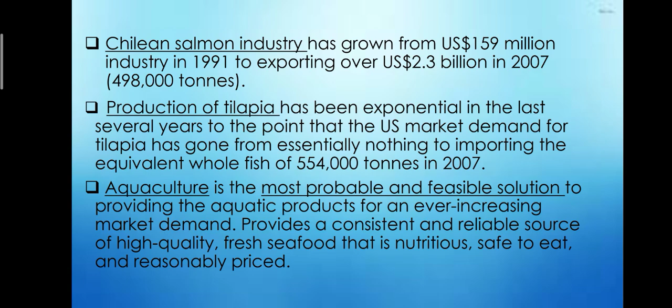It provides a consistent and reliable source of high quality, fresh seafood that is nutritious, safe to eat, and reasonably priced. So here are the positive attributes.

As a comparison, conventional aquaculture methods such as outdoor pond systems and net pen systems are not likely to be sustainable in the long term due to significant environmental issues and their inability to guarantee the safety of their products to consumers.

Indoor fish production employing recirculating aquaculture systems is sustainable, infinitely expandable, environmentally compatible, and has the ability to guarantee both the safety and quality of the fish produced throughout the year.

The indoor recirculating aquaculture system offers the advantage of raising fish in a controlled environment, permitting controlled product growth rates and a predictable harvesting schedule.

Recirculating aquaculture systems conserve heat and water through water reuse after reconditioning by biological filtration using biofilters. These systems allow effective economies of scale, which results in the highest production per unit area and per unit worker of any aquaculture system.

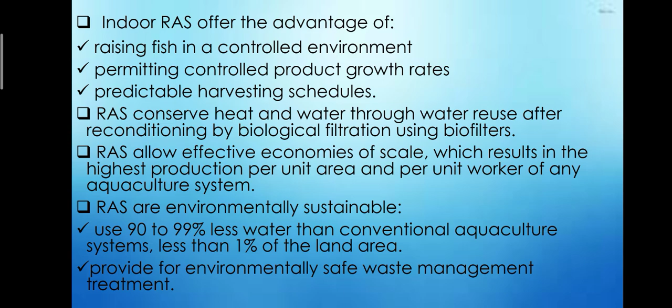Recirculating aquaculture systems are environmentally sustainable. They use 90 to 99% less water than conventional aquaculture systems, and less than 1% of the land area. They also provide for environmentally safe waste management treatment.

Recirculating aquaculture systems allow year-round production of consistent volumes of product and complete climate control of the rearing environment. It is almost universally employed to produce salmon smolts, and designs continue to improve, becoming more cost competitive with conventional aquaculture systems. These designed aquaculture systems are also infinitely scalable.

Indoor aquaculture is probably the only potential method that could be used to ensure a 100% safe source of seafood, free from all chemicals and heavy metals.

With increasing consumer concerns about food safety, aquaculture producers using recirculating aquaculture systems have an unprecedented opportunity to meet the demands for safe seafoods. Attributes of fresher, safer, and locally raised products are clear advantages for recirculating aquaculture system produced seafood.

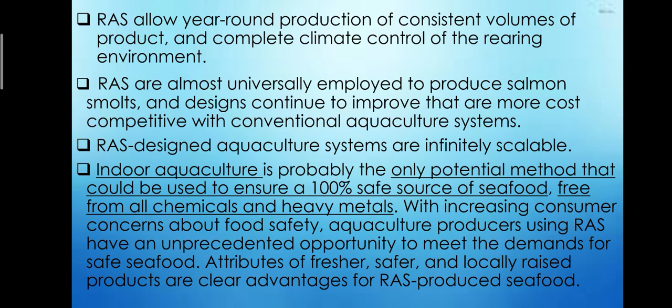There are also numerous commercial systems that have opened with fanfare and have quietly gone out of business. Many of these early systems were designed using traditional wastewater treatment concepts and engineering, with a simple trial and error approach.

So aquaculture engineering has come of age, and systems have been engineered specifically for aquaculture and the unique needs of an aquatic biological system, according to Timmons and Ebeling, 2010.

The species successfully being cultivated in intensive recirculating systems include tilapia, striped bass, cobia, pompano, barramundi, and marine shrimps.

Section 11.2, Overview of System Engineering. This is Figure 11.1, unit processes used in a recirculating system. This figure shows how a recirculation system can be divided into several individual unit processes that may correspond to separate systems or be linked together in a process stream.

The water moves from the central fish culture tank and flows through systems that remove the settleable and suspended waste solids, remove the fine and dissolved solids, convert the ammonia to nitrate, remove carbon dioxide and add oxygen, and finally, when required, disinfect the water before returning it to the culture tank.

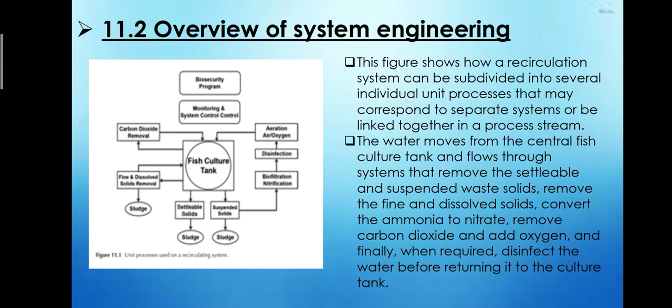The monitoring and control system oversees all of these processes and controls the set points for water quality, sounding an alarm if they move outside of acceptable ranges.

A biosecurity program and process must be absolutely superimposed on the whole process and farm to prevent losses due to disease introduction from the outside.

10 to 20% of the discharge flow from the culture tank is removed from the center drain to take advantage of the teacup effect, which concentrates the solids in the central drain flow.

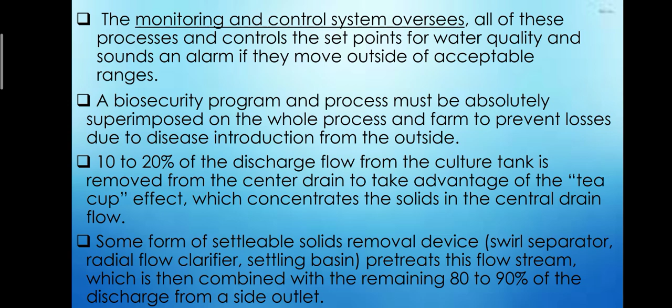Some form of settleable solids removal device, like a swirl separator, radial flow clarifier, or settling basin, pretreats this flow stream, which is then combined with the remaining 80 to 90% of the discharge from a side outlet. This combination of central drain and sidewall drain is usually referred to as a Cornell dual drain system.

Remaining suspended solids are then removed, usually by either a rotating microscreen filter or floating bead filter. Water then flows to some form of biofiltration, such as a trickling tower, bead filter, fluidized sand filter, or moving bed bioreactor, where ammonia is converted to nitrate by autotrophic bacteria.

At high loading densities, a carbon dioxide stripping column is required to remove excess carbon dioxide and aerate the water to saturation. Finally, where high stocking densities are used in commercial systems, an oxygenation device is employed to supersaturate the flow to provide sufficient oxygen.

11.3 Culture tanks. Over the years, people have used a wide variety of materials to construct tanks, including just about anything that holds water. Simple molded polyethylene tanks are often used due to their low cost, smooth surface that makes for easy cleaning, and their low weight, which allows for quick setup and relocation. They work well for the most part, but because they are very soft and malleable, they need to be well supported on the bottom.

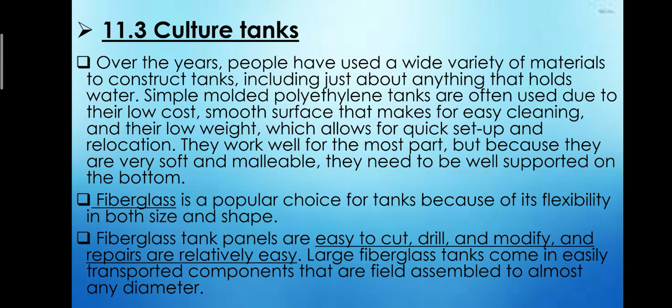Fiberglass is a popular choice for tanks because of its flexibility in both size and shape. Fiberglass tank panels are easy to cut, drill, and modify, and repairs are relatively easy. Large fiberglass tanks come in easily transported components that are field assembled to almost any diameter.

For maximum strength and resistance to abuse, galvanized or epoxy-coated steel modules can be bolted together to form tanks that are extremely large and deep. The bottoms are usually poured concrete where drains and heating coils are embedded, along with the tank sidewalls. Tanks can be partially buried to conserve heat and make fish observations easier.

Concrete must always be an option in making tanks, extremely strong but very permanent.

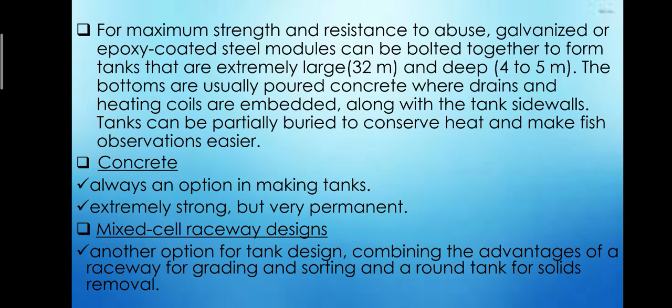Next is mixed cell raceway designs, another option for tank design, combining the advantages of a raceway for grading and sorting and a round tank for solids removal. To promote mixing and solids removal, it is important that the tank has good hydraulic characteristics.

One of the most important rules for a recirculating aquaculture system is that solids need to be removed from the tank as quickly and efficiently as possible to reduce the solids' impact on water quality.

Tanks can be characterized by diameter to depth ratio. This ratio should be maintained at greater than 3, less than 10, and preferably less than 5, as in a deeper tank given the same diameter. Using this range will minimize the problems of solids settling before reaching a center drain, or not settling fast enough to reach the drain by being continually resuspended.

11.4 Waste solids removal. Waste solids are produced in an aquaculture system as uneaten feed, feed fines, fish fecal matter, algae, sloughed biofilm cell mass from biological filters.

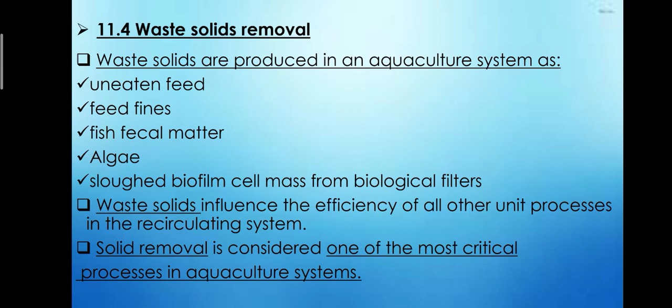Waste solids influence the efficiency of all other unit processes in the recirculating system, so solids removal is considered one of the most critical processes in aquaculture systems.

Solids are generally classified into three categories: settleable, suspended, and fine or dissolved solids. In recirculating systems, the first two are the primary concern, while dissolved organic solids can become a problem in systems with very little water exchange.

Waste solids can be removed either by settling within the culture unit or through the use of a solids removal unit following the rearing tank. Several unit process options are currently being used in aquaculture: settling basins, granular media filters, radial flow clarifiers, mechanical filters, and flotation or foam fractionation.

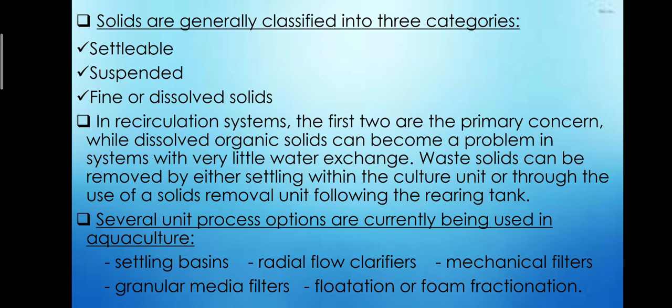11.5, the Cornell dual drain system uses the culture tank itself as a swirl separator, or the teacup effect, and removes most of the settleable solids from a small percentage of discharge from the center drain.

This design is applicable to round tanks and is very effective in removing the majority of large, quickly settleable solids, such as uneaten feed and fecal matter, using only a small portion of the total water flow, 10 to 25%. This waste stream can then be further concentrated using either settling basins or additional swirl separators.

Remember, the objective is to create a small, concentrated flow that is easily treated, rather than a large, diluted flow of waste.

Solids that concentrate at the bottom center can be removed in a small flow stream using a bottom center drain, while the majority of flow is withdrawn at an elevated drain. This dual drain system uses a center drain that removes 10 to 25% of the flow and a higher sidewall drain for the majority of the flow.

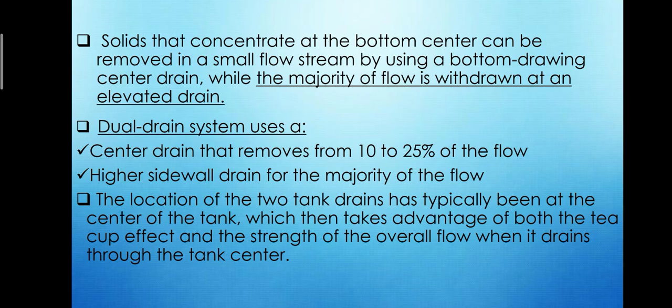The location of the two tank drains has typically been at the center of the tank, which takes advantage of both the teacup effect and the strength of the overall flow as it drains through the tank center.

As we can see in this picture, figure 11.2, this is a sidewall discharge box with a standpipe for water level control, handling 75 to 90% of total discharge flow from the rearing tank.

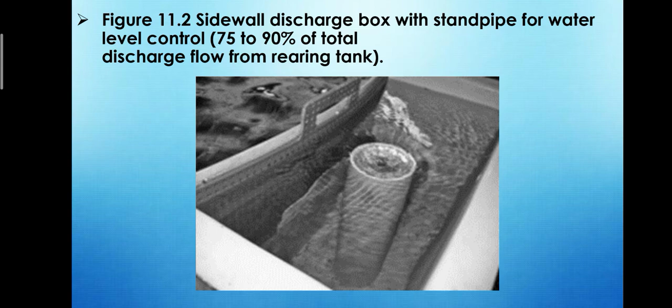Next we have hydraulic retention time: the center drain retention time is 200 minutes, and next is 15 to 25% of total tank flow rate. After calculating these three values, the largest of the three should be used.

The final criterion that should be applied to the drain design outlet is that the tank outlet should be approximately 10% of the tank diameter. This is because if this ratio recommendation is followed, solids should settle on the floor within about 5% of the tank diameter from the center drain and be removed.

The alternative Cornell dual drain approach has significant economic implications. When using this approach, solids removal costs are controlled more by the volume of flow treated rather than the solids concentration of the effluent treated. By concentrating the majority of the solid waste into only 10 to 25% of the flow leaving the tank via the center low flow drain, treatment costs are proportionately reduced as well.

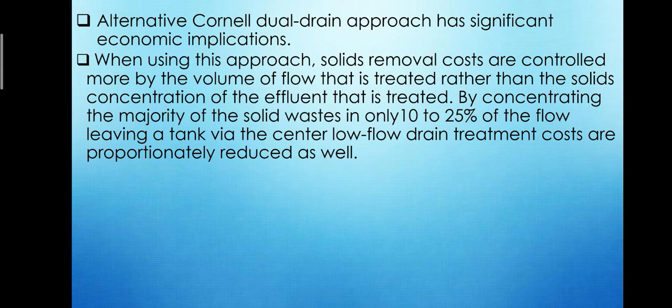Next we have 11.6, settling basins and tanks. A tank that provides a quiet, non-turbulent area where the flow rate is slowed and the solids are allowed to settle out of suspension by gravity.

In an attempt to increase sedimentation, tube or plate settlers, consisting of a sequence of inclined tubes or plates stacked several centimeters apart, are often used. This increases the effective settling area per unit volume and reduces the depth to which a particle must settle to contact the surface.

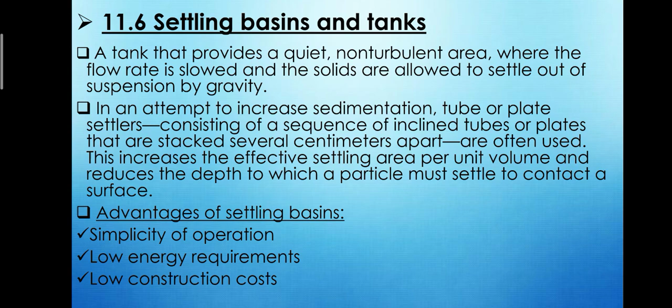The advantages of settling basins are simplicity of operation, low energy requirements, and low construction costs. The disadvantages include the relatively large size of settling basins, low removal efficiencies of small or low density particles, and leaching of nutrients from the settled solids back into the system while the solids are stored in the settling basins.

Another method to increase sedimentation rate is through the use of swirl separators or hydrocyclones. The effluent water from the culture tank is injected at the outer edges of a conical tank so that the water spins around the tank's center axis.

The spinning creates a centrifugal force that moves the particulates toward the wall, where they settle and can be removed continuously. These have most often been used in aquaculture recirculating systems to concentrate the solids from the dual drain culture tank system. Next we have 11.7, mechanical filters.

The two types of mechanical filters commonly used in aquaculture to remove suspended solids are screen filters and expandable granular media filters. Suspended solids, from an aquaculture viewpoint, are the fraction of total solids that will not settle out of the water column in a reasonable amount of time, 30 to 60 minutes.

This fraction of the solid waste needs to be removed from the culture tank water because of its potentially high oxygen demand and mineralization, due to the increased rate of ammonia nitrogen being added to the water column as the protein and urea in the feces is broken down by bacteria into ammonia.

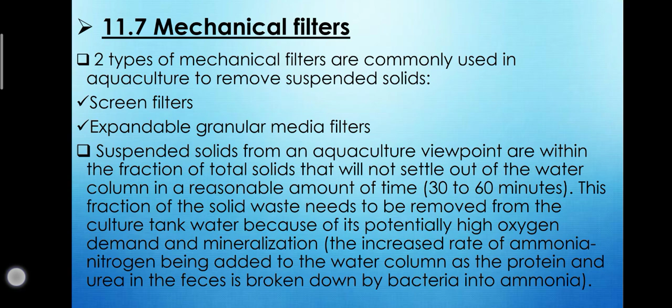Microscreens are used to remove suspended solids in both research and commercial recirculating systems. They act as a form of sieve that retains suspended particles larger than the fine mesh filter screen openings.

The screens are interchangeable, and mesh size is usually selected based on characteristics of the water to be treated, required discharge water quality, and trade-offs of size, cost, and waste discharge volumes. Microscreens are especially attractive when used to remove solids from large flow streams. Additionally, they are compact in size and cause minimal head loss.

So the disadvantages of these systems are high maintenance requirements and the relatively high capital and operating costs.

The performance of the microscreen filter is largely dependent on the size of the filter screen openings, the fraction of particles removed, the filter's hydraulic capacity, sludge water production rate and concentration, and filter backwash frequency.

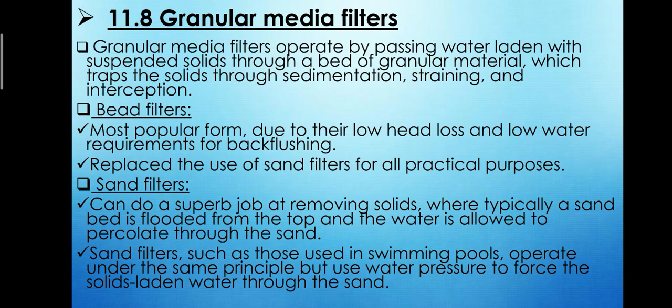When the pressure requirements to push the water through the sand become excessive, the sand filter goes into a backwash mode and discharges large quantities of water. With either sand filter approach, excessive water loss occurs, and management of either design has always been a challenge.

Bead filters employ small 3 to 5 millimeter low density polyethylene beads as the filtering media in pressurized upflow filters. This type of plastic media is commonly used as feedstock for the plastic injection molding process.

Filtration is accomplished by trapping suspended solids particles within the bead matrix and periodically agitating the beads to settle out the trapped solids and biofloc. These filters have been successfully used for both solids capture and biofiltration.

Traditionally, the chief disadvantage of this type of filter has been the large volume of water required for backflushing, although much less is required than in a sand filter design. The PolyGeyser class of bead filters has successfully addressed this problem.

Many of the fine suspended solids and dissolved organic compounds that build up over time in intensive recirculating systems are not removed by mechanical filtration or granular media filters. These solids can be removed by a process usually referred to as foam fractionation, air stripping, or protein skimming.

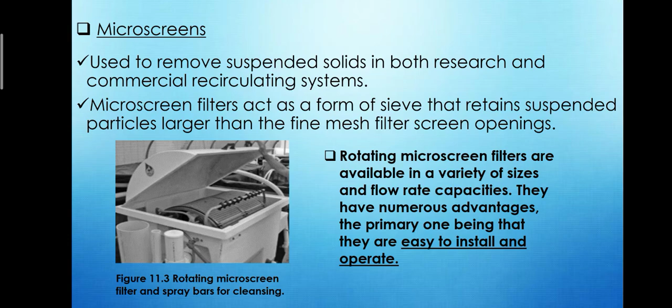In this process, air bubbles rising, air bubbles. Sorry for that.

In this process, air bubbles rising through a closed contact column physically adsorb the fine suspended solids and dissolved organic compounds onto the surfaces of the air bubbles. The bubbles create foam at the top of the liquid column, and the organic waste can then be disposed of along with the foam produced.

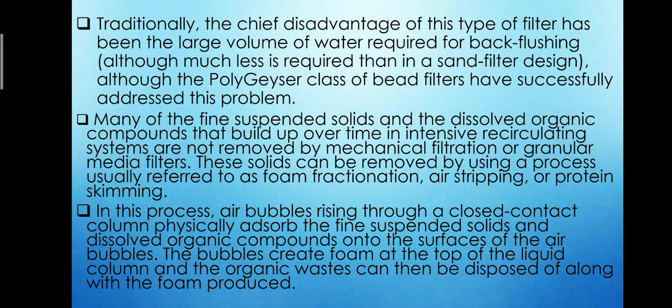Next, we have 11.9, the disposal of the solids. Solids generated by these removal methods can have significant impact on the environment if not disposed of appropriately. In general, aquaculture solid waste is treated as an agricultural waste and considered a non-toxic nutrient source.

Several options are utilized for disposal, including agricultural application on land and composting. Land application of waste solids to an on-site agricultural field is usually the cheapest method of solids disposal.

Land application is governed by regulations that limit the amount of pathogens, heavy metals, and other contaminants, as well as nutrient content, soil type, and plant nutrient uptake characteristics, to prevent runoff or groundwater contamination.

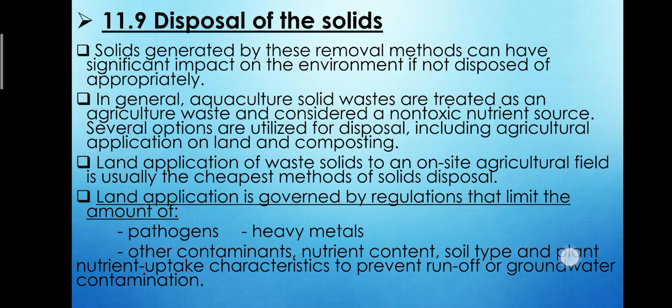One of the newest techniques for containing sludge is to use geotextile bags. These are porous textile bags that receive the waste stream and capture solids while allowing the water to drain off for recapture.

Polymer or flocculation agent is added to the influent to improve solids and liquid separation.

Next, we have alum or ferric chloride, which can also be added as a coagulation aid, which also helps to sequester dissolved phosphorus.

Composting of waste solids using thermophilic bacteria creates a valuable soil amendment and can also be used to dispose of fish mortalities in a safe manner. Anaerobic and aerobic waste lagoons can be used, but will require careful engineering design to be properly sized and managed.

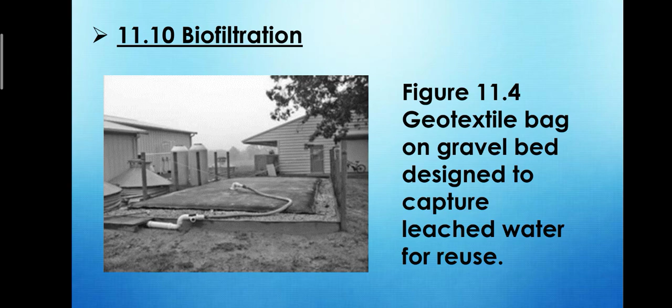Next, we have 11.10, biofiltration. This figure, 11.4, shows the geotextile bag on a gravel bed designed to capture leached water for reuse.

Nitrogen is an essential nutrient for all living organisms and is found in proteins, nucleic acids, adenosine phosphates, pyridine nucleotides, and pigments. In the aquaculture environment, there are four primary sources of nitrogenous waste.

These are urea, uric acid, and amino acids excreted by the fish, organic debris from dead and dying organisms, uneaten feed and feces, and lastly, nitrogen gas from the atmosphere.

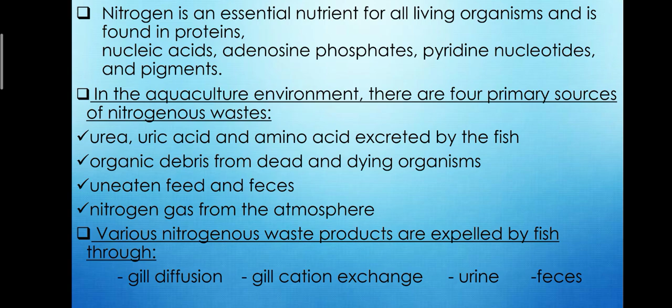Various nitrogenous waste products are expelled by fish through gill diffusion, gill cation exchange, urine, and feces. The decomposition of these nitrogenous compounds is particularly important in intensive recirculating aquaculture systems because of the toxicity of ammonia, nitrite, and to some limited extent, nitrate.

Nitrification is the process of bacterial-driven ammonia removal in a biological filter, consisting of the successive oxidation of ammonia to nitrite and finally to nitrate. Denitrification is the reverse process, an anaerobic process where nitrate is converted to nitrogen gas.

Especially in marine systems, as stocking densities increase and water exchange rates are reduced, resulting in excessive levels of ammonia in the culture system. Nitrification is a two-step process, where ammonia is first oxidized to nitrite and then nitrite is oxidized to nitrate. The two steps in the reactions are normally carried out sequentially. Since the first step has a higher kinetic reaction rate than the second step, the overall kinetics are usually controlled by ammonia oxidation, and as a result, there is usually no appreciable amount of nitrite accumulation.

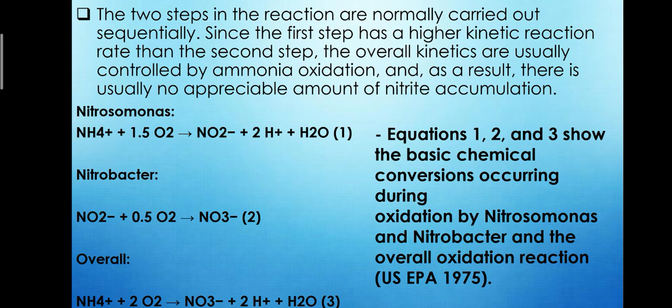So these are the equations 1, 2, and 3. This shows the basic chemical conversions occurring during oxidation by Nitrosomonas and Nitrobacter, and the overall oxidation reaction according to US EPA 1975. Based on these relationships, 4.57 grams of oxygen and approximately 7.14 grams of alkalinity are needed for the complete oxidation of 1 gram of ammonia nitrogen.

Alkalinity, measured or defined in terms of calcium carbonate, is generally added using sodium bicarbonate or baking soda, or calcium carbonate, slaked lime, or hydrated lime. Sodium bicarbonate has the advantage of being rapidly dissolved and very safe to handle. Conversely, the various lime compounds are not easy to dissolve and are dangerous to handle. The lime products, though, are often much less expensive per unit of alkalinity than baking soda.

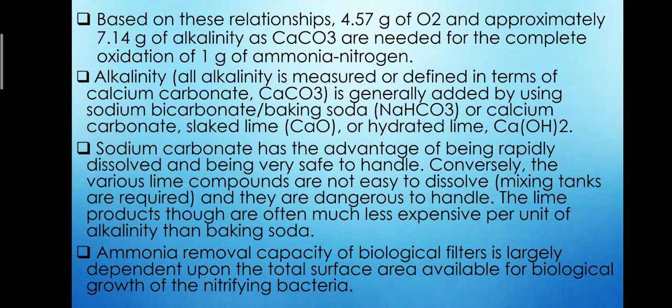Ammonia removal capacity of biological filters is largely dependent upon the total surface area available for biological growth of the nitrifying bacteria. For maximum efficiency, the media used balance a high specific surface area with an appreciable voids ratio for adequate hydraulic performance of the systems.

Media used in biofilters must be first inert, second non-compressible, and non-biologically degradable. Typical media used in aquaculture biofilters are sand or some form of plastic or ceramic material shaped as small beads or large spheres, or rings or saddles.

Biofilters must be carefully designed to avoid oxygen limitation or excessive loading of solids and biochemical oxygen demand, or ammonia. Here are the several types of biofilters commonly used in commercial intensive recirculating aquaculture systems: trickling biofilters, floating bead filters, fluidized bed biofilters, downflow microbead filters, and moving bed bioreactors.

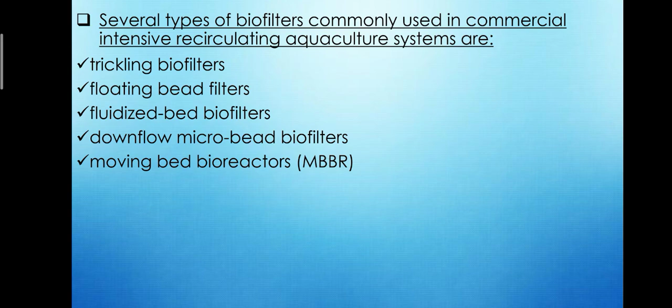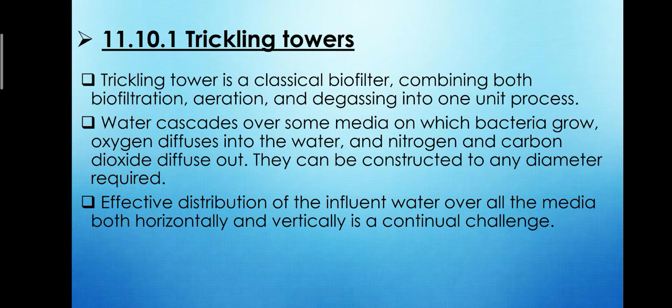Next, 11.10.1, the trickling towers. A trickling tower is a classical biofilter combining biofiltration, aeration, and degassing into one unit process. Water cascades over media on which bacteria grow, oxygen diffuses into the water, and nitrogen and carbon dioxide diffuse out. They can be constructed to any diameter required. Effective distribution of the influent water over all the media, both horizontally and vertically, is a continual challenge.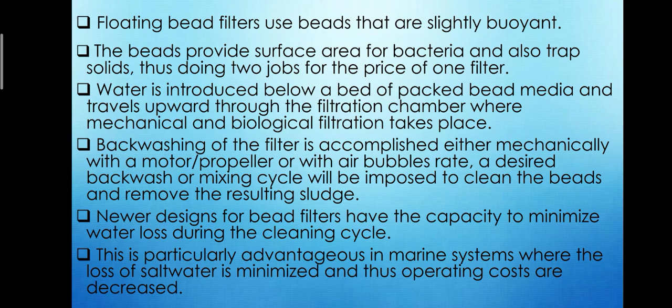Backwashing of the filter is accomplished either mechanically with a motor propeller or with air bubbles. A desired backwash or mixing cycle will be imposed to clean the beads and remove the resulting sludge. Newer designs for bead filters have the capacity to minimize water loss during the cleaning cycle. This is particularly advantageous in marine systems where the loss of salt water is minimized, thus decreasing operating costs.

Next, 11.10.3, fluidized sand beds. These are usually used in large-scale cool or cold water applications and provide large surface area for bacteria in a small footprint. These filters get their name because as water flows up through the sand bed, the sand becomes suspended in the flow, or fluidized. Numerous designs have been investigated and found to perform effectively, particularly for cool water applications that use fine sands. Fluidized sand beds can be relatively more expensive to operate than other filters due to the high pump rates and pressures required to fluidize the sand bed.

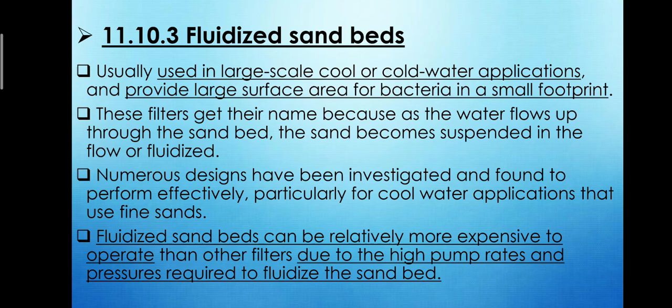Next, 11.10.4, the downflow microbead biofilter.

This has been used for several years due to their simplicity and low cost of media. The filters use small plastic beads, 1 to 3 millimeters, that float in the biofilter as the water flows down through them. The high specific surface area, low head loss, and small footprint make them a strong competitor to other biofilter designs. The styrofoam microbeads are also a fraction of the cost of other media.

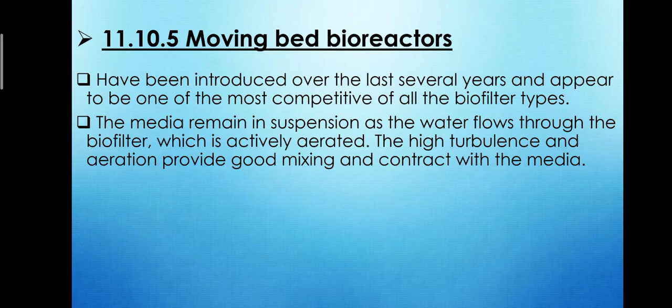Next, we have 11.10.5, the moving bed bioreactors. These have been introduced over the last several years and appear to be one of the most competitive of all the biofilter types. The media remain in suspension as the water flows through the biofilter, which is actively aerated. The high turbulence and aeration provide good mixing and contact with the media.

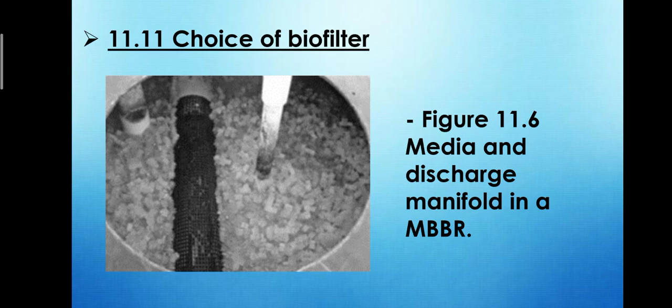Next, we have 11.11, choice of biofilter. In this figure 11.6, this is the media and discharge manifold in an MBBR.

One of the chief advantages of both the trickling biofilter and the MBBR is that they both add oxygen to the water flow during normal operation. They can provide some carbon dioxide stripping. In contrast, the submerged biofilters, floating bead filters, microbead filters, and fluidized bed biofilters are all net oxygen consumers and must rely solely on the oxygen in the influent flow to maintain aerobic conditions for the biofilm. If, for whatever reason, the influent flow is low in dissolved oxygen, or the incoming flow to the biofilter is too low, anaerobic conditions will be generated within the biofilter.

The application of low specific surface area media is a distinct disadvantage for both the trickling biofilters and the MBBR. Since the capital cost is proportional to the total surface area of the filters, the result is physically large and requires more costly filters. In contrast, floating bead filters, and especially fluidized bed filters and downflow microbead filters, use media with high specific surface area, resulting in reduced cost and space requirements for the equivalent surface area.

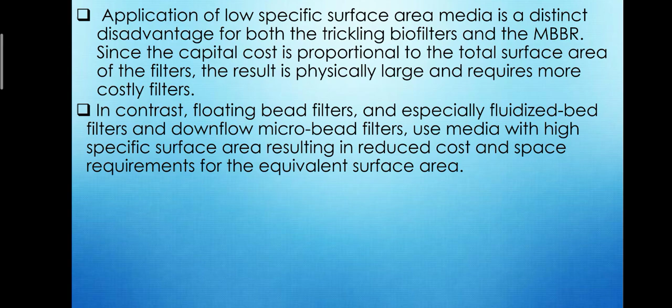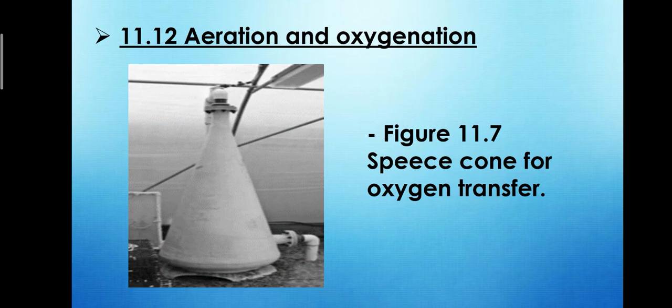Next, we have 11.12, aeration and oxygenation. This figure is the Speece cone for oxygen transfer. Dissolved oxygen is the first limiting factor in intensive aquaculture systems. Minimum dissolved oxygen concentrations of 4 to 6 milligrams per liter are required for optimal growth and survival of most aquaculture species. At densities up to 45 kilograms per meter cubed, aeration with atmospheric oxygen is adequate to maintain this level and is commonly referred to as aeration.

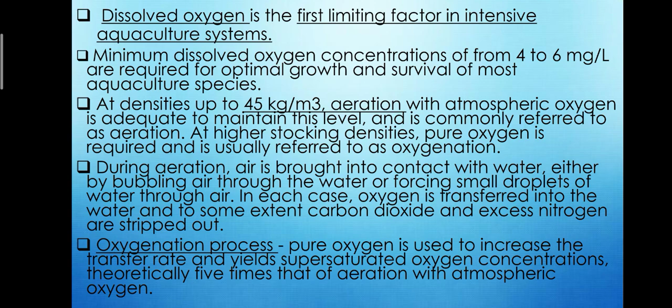At higher stocking densities, pure oxygen is required and is usually referred to as oxygenation. During aeration, air is brought into contact with water, either by bubbling air through the water or forcing small droplets of water through air. In each case, oxygen is transferred into the water and, to some extent, carbon dioxide and nitrogen are stripped out. Oxygenation process: pure oxygen is used to increase the transfer rate and yield supersaturated oxygen concentrations, theoretically five times that of aeration with atmospheric oxygen.

Oxygen can be produced on site using pressure swing adsorption equipment, or purchased in bulk liquid or gas form from commercial sources. There are numerous types of oxygen transfer equipment now available from commercial sources. This includes U-tubes, packed columns, multi-stage low-head oxygenation units, pressurized columns, oxygenation cones, oxygen aspirators, bubble diffusers, and enclosed mechanical surface mixers. The two most often used in large-scale commercial systems are the downflow bubble contactor and the multi-stage low-head oxygenation unit.

The downflow bubble contactor consists of a cone-shaped column with water and oxygen injected at the top and removed at the bottom. As the water and oxygen bubbles move down the cone, the downward velocity of the water decreases due to the increasing cross-sectional area until it equals the upward velocity of the oxygen bubbles. This yields a long contact time between the oxygen bubbles and the water, resulting in oxygen diffusion efficiencies at or above 90%.

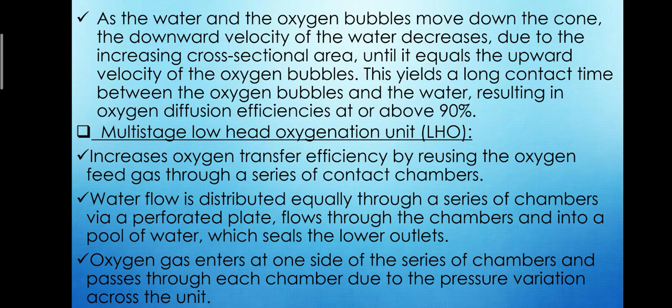Next, the multi-stage low-head oxygenation unit. It increases oxygen transfer efficiency by reusing the oxygen feed gas through a series of contact chambers. Water flow is distributed equally through a series of chambers via a perforated plate, flows through the chambers and into a pool of water, which seals the lower outlets. Oxygen gas enters at one side of the series of chambers and passes through each chamber due to the pressure variation across the unit. The repeated contact of oxygen and water in each chamber provides a high rate of gas transfer, both oxygen into the water and excess nitrogen out.

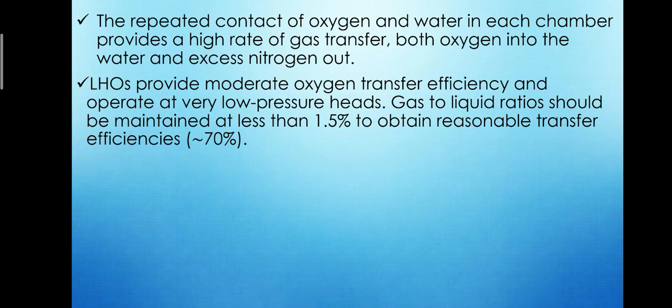LHOs provide moderate oxygen transfer efficiency and operate at very low pressure heads. Gas to liquid ratios should be maintained at less than 1.5% to obtain reasonable transfer efficiencies.

Next, we have 11.13 Carbon Dioxide Removal. Carbon dioxide is a product of respiration of fish and other organisms in the production system, such as the bacteria and the biofilm. At low stocking densities, carbon dioxide is removed by physical agitation and exposure of the water to air. But advances in recirculation system design and management have resulted in a steadily increasing stocking density of fish and a reduction in water exchange rates.

As a result, carbon dioxide often becomes a limiting factor in some intensive production systems. For every gram of oxygen consumed, 1.38 grams of carbon dioxide is produced. Carbon dioxide obstructs the respiration of fish by reducing the capacity of the blood to transport oxygen through a physiological phenomenon known as the Bohr effect.

Carbon dioxide also directly affects the overall system performance by decreasing its pH, which can stress the fish and inhibit the nitrifying bacteria in the biofilters.

Carbon dioxide can be controlled by gas exchange in a downflow trickling tower or packed column aerator, similar to the downflow trickling tower used for biofiltration. As the water containing carbon dioxide flows over the media in the column, air is forced either up or down the column and carbon dioxide is removed by gas transfer across the thin water or air interface on the media surface.

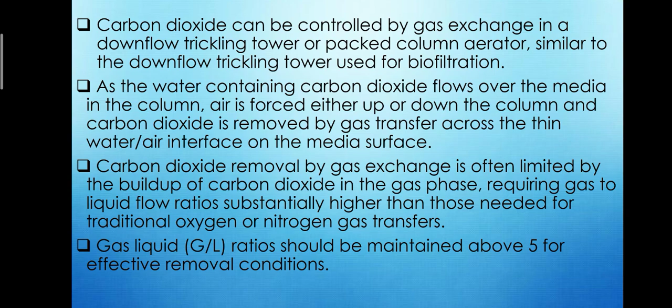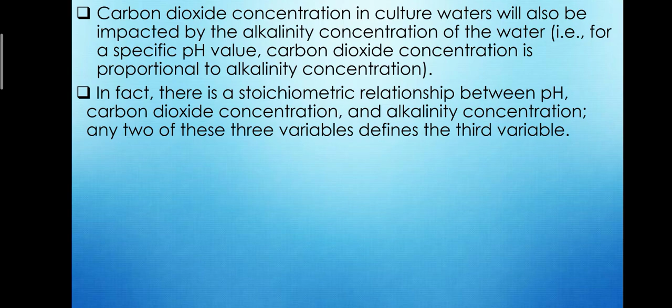Carbon dioxide concentration in culture waters will also be impacted by the alkalinity concentration of the water. In fact, there is a stoichiometric relationship between pH, carbon dioxide concentration, and alkalinity concentration. Any two of these three variables defines the third variable.

Next, we have 11.14 Monitoring and Control. As the stocking density of fish continues to increase, the need for continuous monitoring and control of critical operations such as water flow, tank water level, and oxygen concentration also becomes essential to prevent catastrophic fish losses.

It takes only one mistake to kill everything in your facility. Today, continuous monitoring systems are commercially available and relatively reliable. All alarms should report to a phone dialer to notify staff both during and after working hours.

Monitoring and control systems can be as simple as a solenoid valve that automatically opens an oxygen supply line to aerate during a power failure. For most facilities, simple, fairly inexpensive monitoring auto-dialer systems are commercially available, which will monitor 8 or more switch inputs and automatically switch on backup systems and dial out in emergency situations.

At the other extreme are sophisticated computer control systems that monitor multiple parameters with redundant backup systems, internet pages for offsite monitoring, and phone dialers to alert management of system status and alarms.

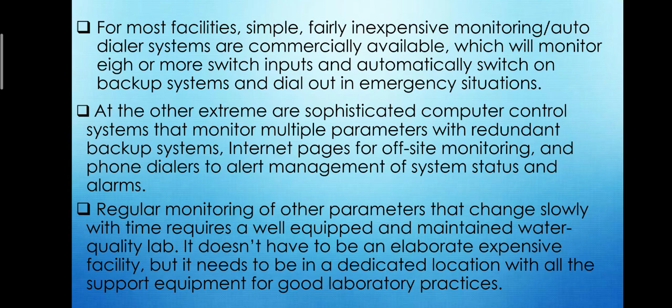Regular monitoring of other parameters that change slowly with time requires a well-equipped and maintained water quality lab. It doesn't have to be an elaborate, expensive facility, but it needs to be in a dedicated location with all the support equipment for good laboratory practices.

Next, we have 11.15 Current System Engineering Design. Designing a recirculation system seems more like ordering from a Chinese menu, where the designer selects one unit from column A, another from column B, another from column C, and then integrates them into the optimal design.

These are the important design questions that determine what unit processes to use: species to be produced, stocking density, production capacity, and sensitivity of species to water quality parameters such as temperature, dissolved oxygen, ammonia nitrogen, pH, and carbon dioxide.

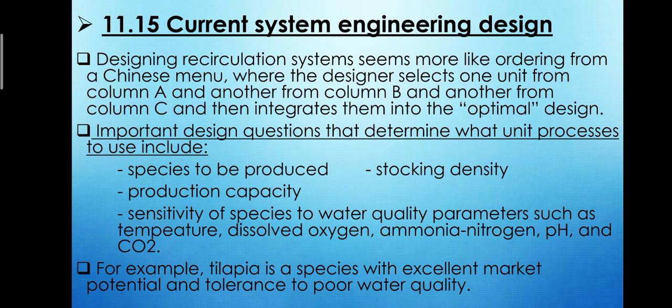For example, tilapia is a species with excellent market potential and tolerance to poor water quality. Many marine species of commercial interest have very high water quality requirements. Numerous combinations and permutations of the above unit processes have been implemented over the past decade, and although no one system design has become the standard, several combinations seem to work well together.

Although microscreen filters have a high capital cost, their ease of installation and operation make them economically attractive. Most biofiltration is now accomplished with either a moving bed bioreactor or some form of granular media filters, such as a downflow bead filter or a fluidized sand filter.

The main advantage of the moving bed bioreactor is the aeration and degassing it provides, reducing aeration or oxygenation requirements. Fluidized sand filters have the advantage of lower capital cost and smaller size, but higher operating cost.

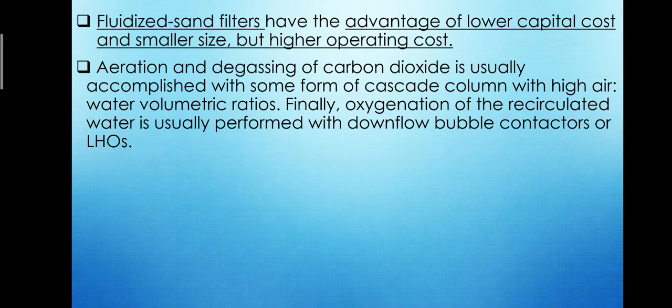Aeration and degassing of carbon dioxide is usually accomplished with some form of cascade column with high air-water volumetric ratios. Finally, oxygenation of the recirculated water is usually performed with downflow bubble contactors or LHOs. Next, we have 11.16 Recirculation System Design.

11.16.1 The mass balances, loading rates, and fish growth. All system designs should begin with a mathematical analysis of the system loadings.

Water flow is the mechanism by which oxygen is transported into a fish culture vessel and waste products generated within are removed. So the design of a recirculating aquaculture system should ensure that the important parameters affecting water quality and fish productivity are properly balanced. This requires calculating the required flow rates via mass balance equations to maintain the design water quality variables at or below their maximum tolerable or design target values.

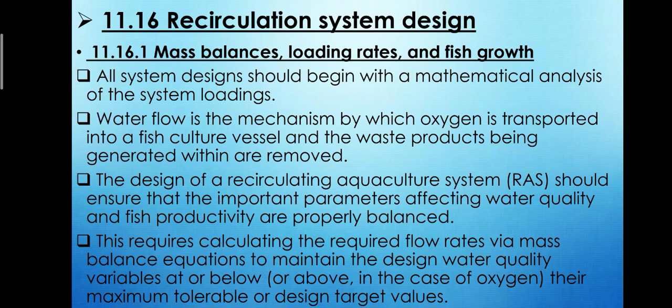The system must operate at the highest flow rate calculated for these four critical water quality parameters. Obviously, the maximum flow rate used to maintain the constraining water quality parameter will be higher than necessary for the others, which simply means these water quality parameters will be at better values than design targets.

The same mass balance approach can be utilized on any variable affecting water quality. It simply comes down to balancing the transport in of some parameter, the production of this particular parameter within the culture tank, and the transport out of the parameter. So in word equation form: transport in of X plus production of X is equal to transport out of X.

The production term can be the production of oxygen, ammonia, suspended solids, or CO2. Note that the production term can be negative, meaning consumption of a certain component. Also note that X does not refer to a concentration of X, for example in milligrams per liter, but rather a mass quantity of some stuff referred to as X in the word equation.

This is the control volume approach. Engineers like to depict mass transport across some imaginary box that designates the vessel or container we're trying to analyze. For RAS, it can be assumed that the culture tank represents a completely well-mixed tank and that the tank has reached a non-changing condition with respect to time, or steady state conditions.

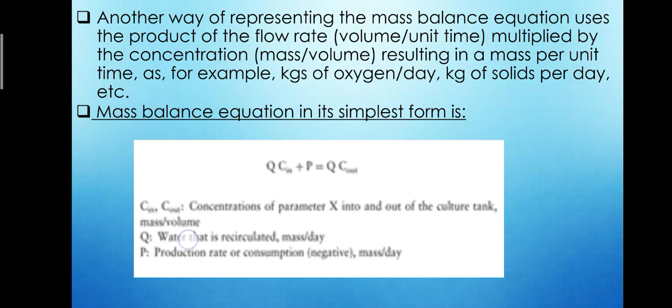Another way of representing the mass balance equation uses the product of the flow rate, volume over unit time, multiplied by the concentration, mass per volume, resulting in a mass per unit time, such as kilograms of oxygen per day or kilograms of solids per day. So this is the mass balance equation in its simplest form.

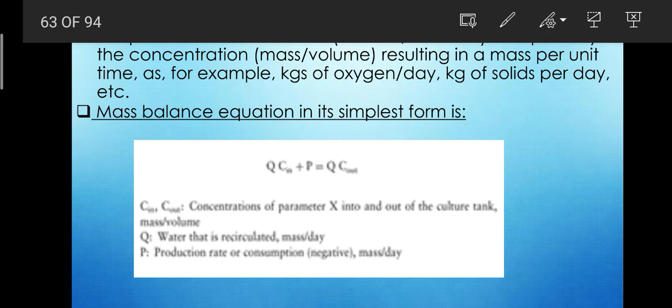11.16.2 Selecting target values. The designer or manager must choose design or target operating conditions to calculate the mass balances. These are the C values in the mass balance equation. These design numbers are species dependent and are continually being refined for RAS applications.

Calculating the minimum flows required to maintain targeted values for water quality will show how sensitive the calculated flow rates are to the values selected for the design value. A typical scenario is to select a value, do the calculations, realize there is no way you could afford to supply such a high flow rate, and then start to make adjustments in the targeted value.

In the end, one must choose realistic values at the beginning of the design process and then stay with these choices and the ramifications of the resulting flows required to maintain the mass balances. Do not ever compromise on the required flow rates.

Next, 11.16.3, the water treatment device. Each treatment box is a system that improves the water quality of the water. The concentration of the particular water quality parameter leaving the treatment device can be calculated by knowing the absolute best the treatment device could achieve and the treatment efficiency of the particular device being used.

The treatment efficiency should be provided by the device supplier and manufacturer. Solving the general mass balance equation applied to the treatment box determines the concentration of each particular water quality parameter leaving the treatment device. The treatment device could be a biofilter, a CO2 stripper, or a solids settling chamber. Each will have its own treatment efficiency for the particular water quality parameter it is designed to treat.

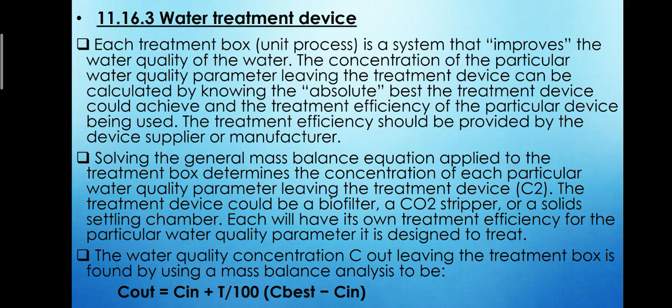So the water quality concentration, C out, leaving the treatment box is found by using a mass balance analysis. So this is the equation: T is the treatment efficiency in percent, and C best is the absolute best result obtainable by a treatment system.

Note that if the device is an oxygen addition unit, the C best term can be increased above atmospheric concentration values for oxygen by increasing the partial pressure above the atmospheric oxygen partial pressure in the device. For example, a pure oxygen device will have a C best value of roughly 5 times the C best value obtained if normal air were used at atmospheric pressure. C best for most other parameters should be fairly obvious to the reader.

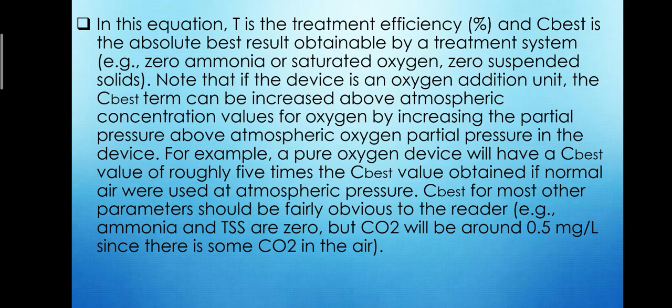11.17 covers major water treatment variables. First is 11.17.1, oxygen. The major reason most fish die is from lack of oxygen due to a loss of water flow.

This is because oxygen is consumed at a fairly high rate by fish metabolism, and oxygen is transported by water flow. Due to low inherent concentrations of oxygen, high flows are required to transport the required oxygen. Flows required to maintain a satisfactory oxygen level are generally the controlling flow rate parameter when solving the series of mass balance equations to determine the most restrictive parameter.

Even a partial loss of flow will generally result in insufficient oxygen for the fish, resulting in death. Ask yourself if your monitoring systems will sense a reduction in flow as opposed to a complete loss of flow.

It is important to remember that not only do the fish require oxygen, but also the biological filter, which is critically dependent upon adequate oxygen levels to support bacteria metabolism. The dissolved oxygen concentration within the filter must be maintained at or above 2.0 mg per liter to ensure that the rate of nitrification in the filter does not become limited because of oxygen depletion. Always measure the DO coming out of the biofilters, and if the concentration starts to approach 2.0 milligrams per liter, take corrective action.

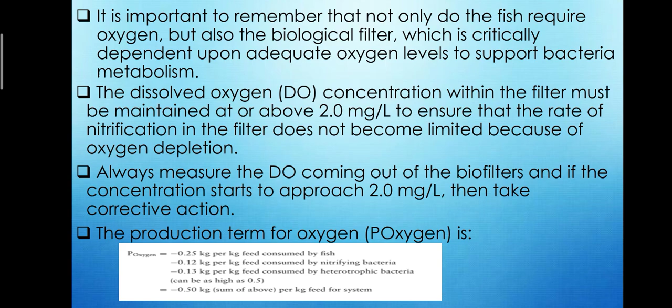So the production term for oxygen is equal to negative 0.25 kilograms per kilogram feed consumed by fish, negative 0.12 kilograms per kilogram feed consumed by nitrifying bacteria, and negative 0.13 kilograms per kilogram feed consumed by heterotrophic bacteria, which can be as high as 0.5. The total is equal to 0.50 kilograms, the sum of the above, per kilogram of feed for the system.

These oxygen terms are all negative since they consume oxygen from the system as opposed to adding a mass quantity to the water column. The heterotrophic bacteria load can be as much as 0.5 kilograms of oxygen per kilogram of feed fed, or higher if the system has poor solids removal.

The oxygen consumption term is always much higher when solids management in a recirculating aquaculture system is not good. A safe number for design purposes might be closer to 1 kilogram of oxygen per 1 kilogram of feed used. This would be twice as high as the above suggestion.

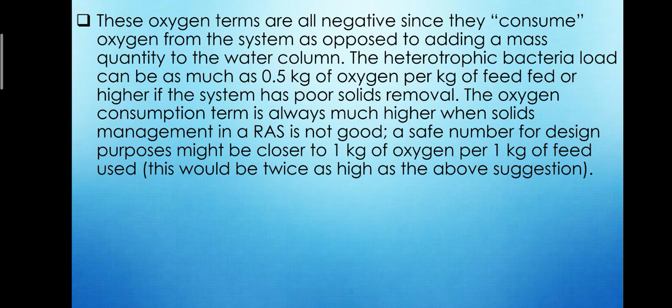11.17.2, ammonia. There is considerable confusion about design target values for ammonia concentration. Definitive values for the toxic levels of ammonia, and the differentiation between the toxic NH3 form and the supposed non-toxic NH4 positive form, have not been precisely determined. The apparent toxicity of ammonia is extremely variable and depends on more than the mean or maximum concentration of ammonia.

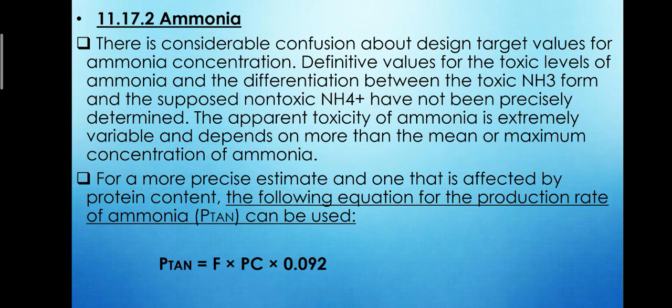For a more precise estimate, one that is affected by protein content, the following equation for the production rate of ammonia can be used. F is the daily feeding level and PC is the protein content of the feed being fed. In this equation, the time period used is 1 day.

In a recirculating aquaculture system, feed can be fed uniformly over a 24-hour period, thus distributing the ammonia load uniformly over the entire day as well. If a uniform 24-hour feeding is not used, then the above equation should be adjusted and the time period should be the time between feedings. Or, if a single feeding per day is used, then use 4 hours as the time period, as an estimate of the time for the ammonia to be excreted from a feeding event.

Note that in the above equation, the feed is assumed to be fed uniformly over a 24-hour period. If the feeding period is concentrated into some fraction of the day, then the production equation for TAN must be adjusted upward accordingly. For example, if you feed over a 12-hour period, then the P-TAN term will be twice as large for design purposes, requiring your biofilters to be twice as large. This is why in recirculating aquaculture systems you generally feed the fish over a 24-hour period when possible.

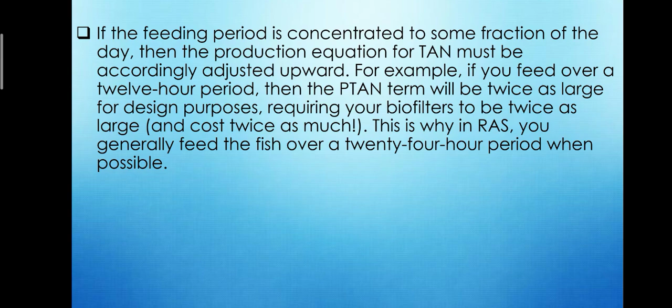Next, 11.17.3, carbon dioxide. It is an important but largely overlooked water quality limiting parameter. This is probably because until recently, most systems were generally low density.

This type of management also kept CO2 values at low levels. However, loading rates have increased in recent years and it has become necessary to inject pure oxygen into these systems instead of using aeration.

As a result, the natural stripping of carbon dioxide that occurs when using aeration systems was no longer taking place. Carbon dioxide production can be explicitly related to oxygen consumption as the ratio of molecular weights, 44

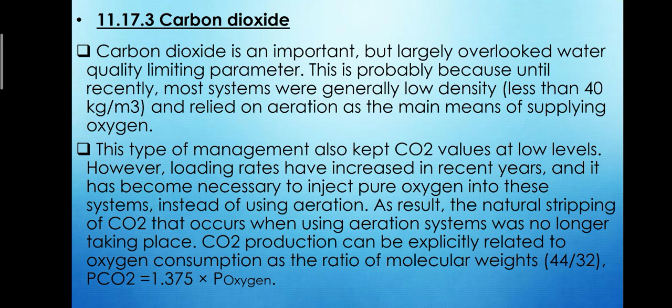by 32. 11.17.4, the suspended solids. The effective control of solids generated in RAS is probably the most important task that must be accomplished to ensure long-term successful operation of our RAS.

TSS design concentrations in RAS will be in the 10 to 100 milligrams per liter range, even after concentrating TSS with some type of treatment process, such as a rotating screen filter. The discharged water will still contain only around 0.5 to 1% solids on a dry matter basis. In comparison, cow manure is 20% solids.

TSS captured in a settling basin has a fluffy consistency and will require substantial volumetric space depending upon frequency of cleaning. As a rule of thumb, assume that each kilogram of dry feed fed will produce approximately 25 liters of liquid waste or 1% solids.

Next, we have 11.17.5, the nitrate nitrogen. Nitrate nitrogen is not considered in the mass balance equations to determine maximum required flow rate. In saltwater system, though, nitrate should be considered. Nitrate nitrogen is the end product of the nitrification process. In general, concentrations of nitrate are not extremely adverse to RAS water quality.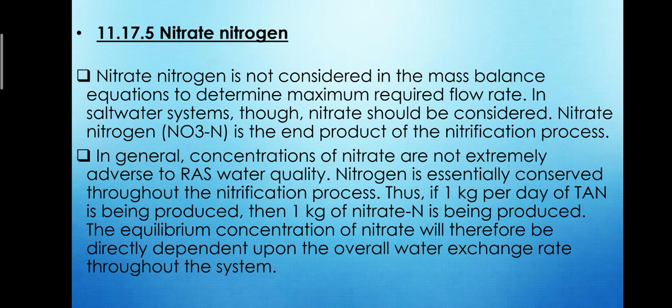Nitrogen is essentially conserved throughout the nitrification process. Thus, if 1 kilogram per day of TAN is being produced, then 1 kilogram of nitrate is being produced. The equilibrium concentration of nitrate will therefore be directly dependent upon the overall water exchange rate throughout the system.

So nitrate nitrogen is relatively non-toxic to freshwater fish and as such will not influence the controlling flow rates in the system. One can choose some values such as 200 milligrams per liter if you want a number to work with.

More recent unpublished information seems to indicate that for various salmonids, the nitrate levels should not exceed 40 to 50 milligrams per liter. So the design information is very limited relative to this water quality parameter, especially for saltwater system.

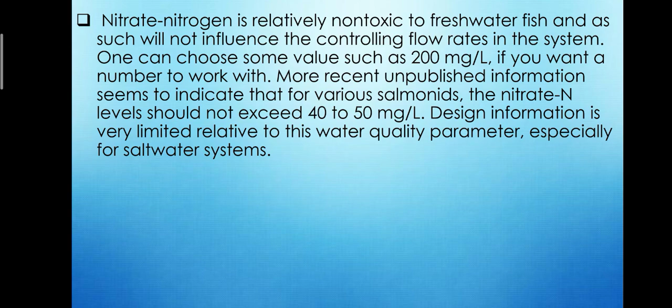Next, we have 11.18. This is the summary of 4 production terms. These 4 terms are called the production terms or the P terms in the mass balance equation. Summarizing, the 4 production terms related to feed being fed is as follows.

So we have P oxygen equals negative 0.50 kilograms per kilogram of feed consumed by fish. The P carbon dioxide equals 1.375 grams produced for each gram of oxygen consumed. P TAN, we have F times PC times 0.092.

And the P solids equals 0.25 times the kilogram feed fed, dry matter basis, range of 0.20 to 0.40.

11.18.1, Predicting fish growth. So the basic premise of RAS engineering is to produce a given volume of market-sized fish at some predetermined schedule. Based on the growth rate and stocking density, the size and number of production tanks can then be estimated. The production rate also defines the required fish feeding rate, which then in turn determines the waste generation loads and also oxygen consumption rate.

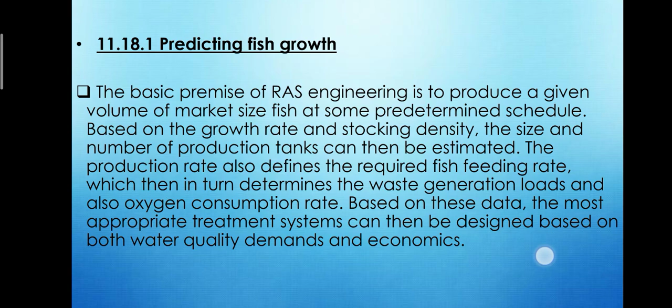Based on this data, the most appropriate treatment systems can then be designed based on both water quality demands and economics. So this is Table 11.1. This is the temperature growth units in degrees Celsius and degrees Fahrenheit for trout, tilapia, yellow perch, and hybrid striped bass.

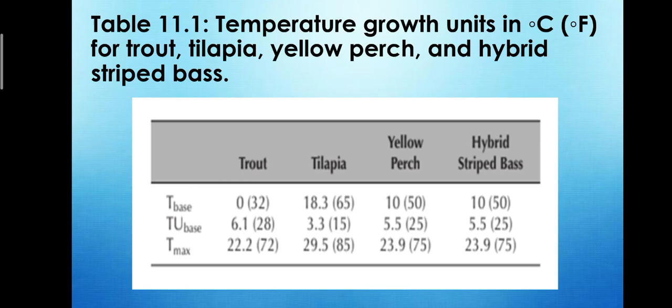So a common way of defining fish growth is based on existing data sets of production trials under commercial stocking densities, feed rates, and water quality conditions. A second way is based upon a temperature unit approach, which defines a number of temperature units to create a unit growth rate, such as centimeters per month.

Next, we have 11.19, the stocking density. The final and most important question that must be addressed in system design is the mass of fish that can be maintained in a tank, or more appropriately, the mass of fish that can be maximally supported.

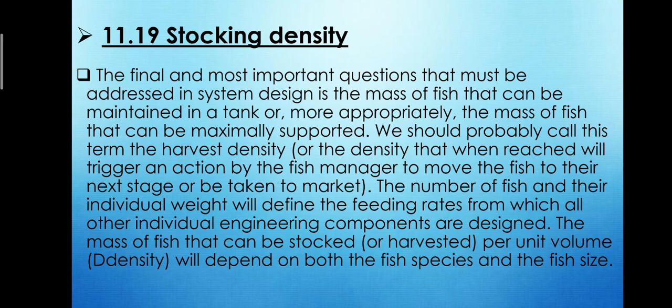We should probably call this term the harvest density. The number of fish and their individual weight will define the feeding rates from which all other individual engineering components are designed. The mass of fish that can be stocked per unit volume will depend on both the fish species and the fish size. We use an approach based upon body length to estimate the number of fish that can be carried per unit volume tank.

So this is the estimated number of fish that can be carried per unit volume tank. The maximum allowable safe densities for fish stocking is primarily a function of fish size, species, and the characteristics of the rearing environment and management skills.

New growers tend to overestimate their own safe loading densities and assume that they can establish and sustain densities from the very beginning that in fact require expert management skills. Do not fall into this trap, you will kill fish. New growers should target about half the densities recommended for expert growers. For example, a tilapia system for a new grower should probably be operated at a maximum density of 50 kilograms per meter cube, rather than 100 to 120 kilograms per meter cube.

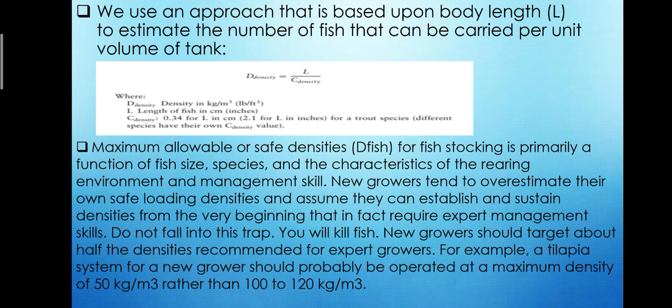Let's assume a target production capacity of 500 metric tons of tilapia per year, with a target market size fish of 750 grams, whole on ice. Tilapia fingerlings are purchased at a mean size of 50 grams. A three-stage production system is decided upon.

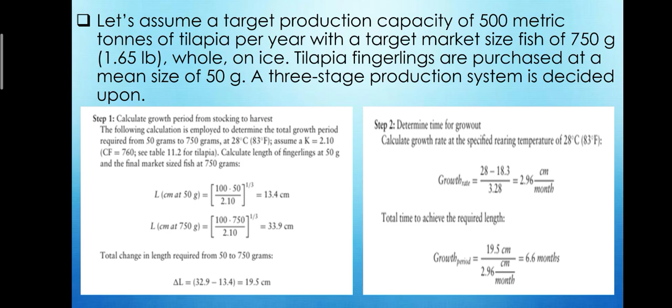Step 1 is to calculate the growth period from stocking to harvest. Step 2 is to determine the time for grow out. Step 3 is to determine the production strategy. Step 4 is to calculate weekly harvest weight. Step 5 is determining the number of fish per tank at harvest. Step 6 is to estimate final tank biomass at each stage.

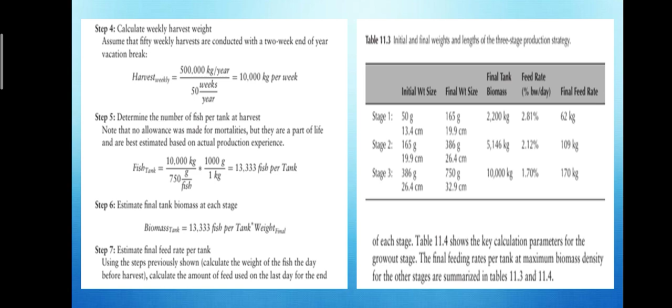Step 7 is to estimate the final feed rate per tank. In table 11.3, we can see the initial and final weights of the three-stage production strategy. Step 8 is to determine the controlling flow rate for these design problems. This is table 11.4, the key calculation parameters used for the grow out stage.

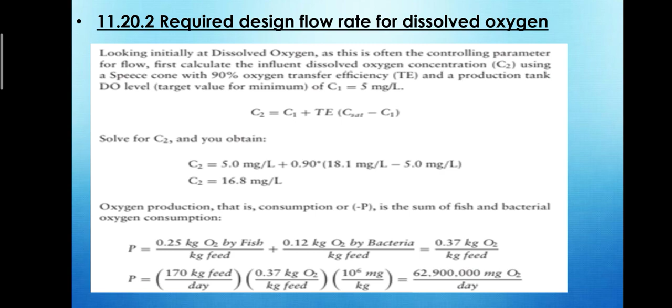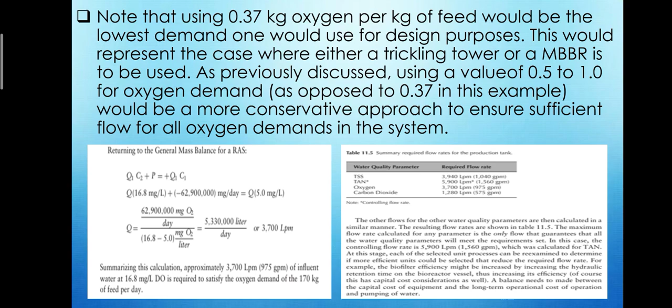11.20.2, required design flow rate for dissolved oxygen. Note that using 0.37 kilograms oxygen per kilogram of feed would be the lowest demand one would use for design purposes. This would represent the case where either a trickling tower or MBBR is to be used. As previously discussed, using a value of 0.5 to 1.0 for oxygen demand would be a more conservative approach to ensure sufficient flow for all oxygen demands in the system.

11.20.3, calculating tank sizes. The last step in our design process is to determine the tank sizes necessary for each of the three stages for our 500-ton production farm. The tank size can be determined based on the allowable fish biomass stocking densities.

As previously determined, the final fish biomass per tank was 2,195 kilograms for the fingerling stage, stage 1, and 5,146 kilograms for stage 2, and 10,000 kilograms for the grow out tank, stage 3. Note how the system supports larger biomasses of fish as the fish increase in size. This is because the fish requires space or room by length and not by body mass, and mass is proportional to length cubed.

Correspondingly, the stage 2 final tank density is 110 kilograms per meter cube, and the grow out tank stage 3 at harvest is 137 kilograms per meter cube. The required volume of each tank for each of the three stages is equal to the total biomass for that stage cohort of fish divided by the stocking density, for example, this one.

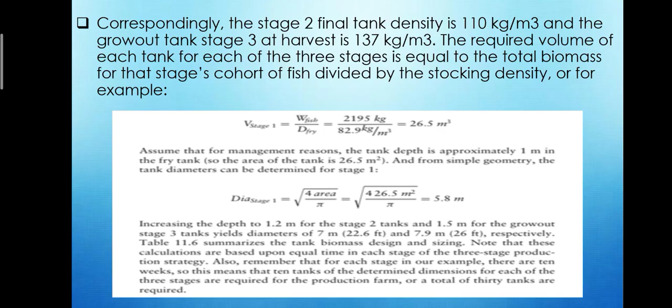Now we have 11.21, the conclusion. The design and engineering of intensive recirculating aquaculture systems has made significant progress over the past several decades. System components have been designed and engineered especially for aquaculture and are field tested and available from several commercial sources. System integration is just beginning to be investigated to determine optimal configurations of an overall system design based on species, production levels, and water quality requirements.

Even with all the successes and improvements, it is still challenging to implement and manage recirculation systems that are cost competitive with other less capital intensive production strategies.